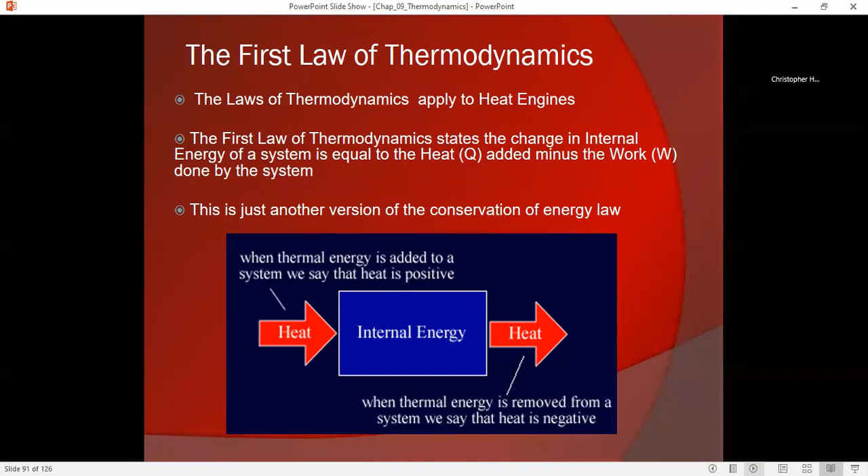What is a heat engine? Well, a heat engine is something that takes thermal energy in the form of heat, converts some of it into work, but this comes at a price. Not all the heat can be converted into 100% work. So some of the heat actually has to be dumped back into the environment where it is simply lost and is not useful in terms of doing anything.

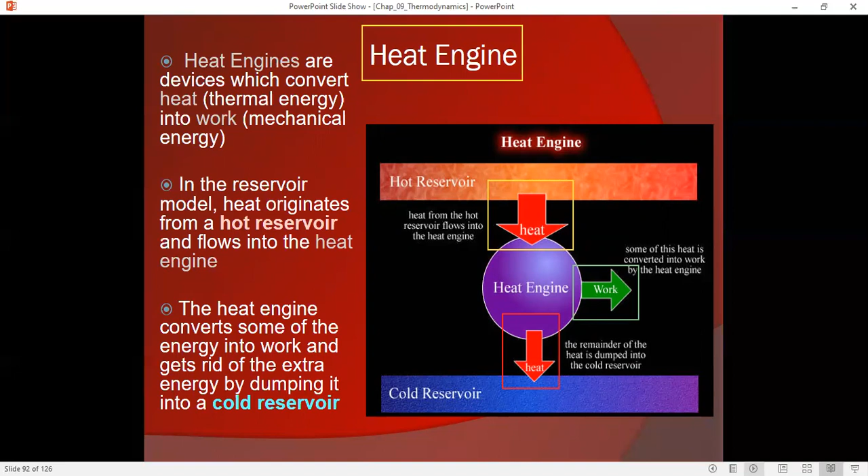So again, we can think about a heat engine as taking some energy from a source. This can be a chemical source. It can be a source such as a nuclear reactor. Some form of energy is going to be converted into heat.

Once it's converted into heat, typically we're going to allow some sort of gas, fluid, whatever, expand. And as it does so, it is going to do work. However, we've got to get rid of some of the heat that we've generated. So what we need to do is dump that heat as waste into the environment.

And of course, we can see factories have smokestacks, internal combustion engines have exhausts. All of these are a way of not only getting the reaction products into the environment, but also dumping waste heat. So that's our general idea here. We're not going to be able to get all of it. We're going to try to get as much of the heat as possible to do work for us.

One of the easiest ways to do work, and one of the first ways that people realized how to do work on the environment, was to use something called a cylinder. And a cylinder would be this cylindrical container, which would have this movable piston.

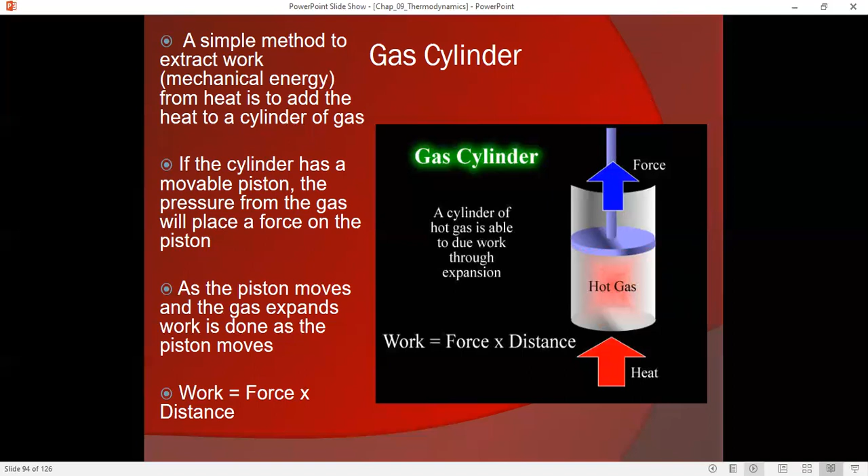Okay, so how are we going to make that piston move? Well, that's not that hard. Think about it, anytime we heat a gas, that gas increases in pressure. It wants to occupy more volume. So there's going to be more force on the piston, so it can do more force and do work on the outside. So that was basically the idea of some of the first steam engines.

You heat up, typically water. The water produces steam. The steam then goes into a piston. The piston moves forward, and a lot of times they want reciprocal motion. They want cyclical motion, so they have the piston hooked up to a flywheel. The flywheel would turn, and that's where they'd get their work from.

The problem is the piston can't move forward forever. So what we need to do is either cool the hot gas down, so it has less pressure and it wants to contract, or if we want to get rid of this hot gas completely, we simply vent it into the environment. So the steam engine would have steam enter the gas cylinder. The cylinder would expand, it would do work on the environment.

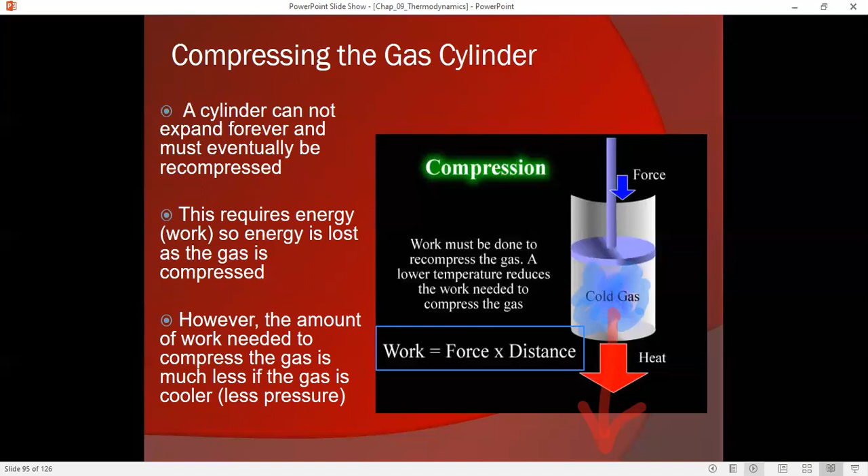And then on the next phase, we would compress the cylinder, basically just have the steam go to the outside. This would allow the whole process to begin over again. The problem is when you recompress the cylinder, you are doing work, so we always lose a little bit of energy as we dump the heat to the outside. Again, we can see this in our diagram.

What is our idea here? We want to get as much work out of the system as possible, so we use the heat to do work on the outside. But when we recompress the piston, we need to get rid of all that hot material we already have. So we dump that heat into the environment as we recompress the cylinder, exhausting this energy, this hot gas that we've already used.

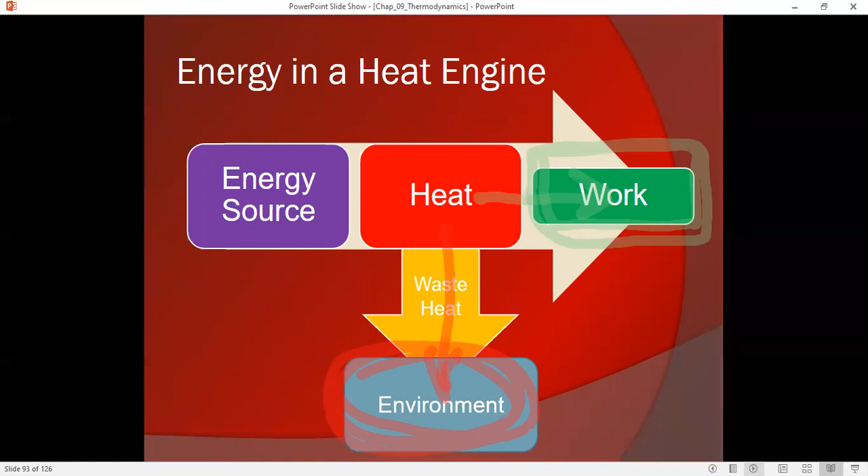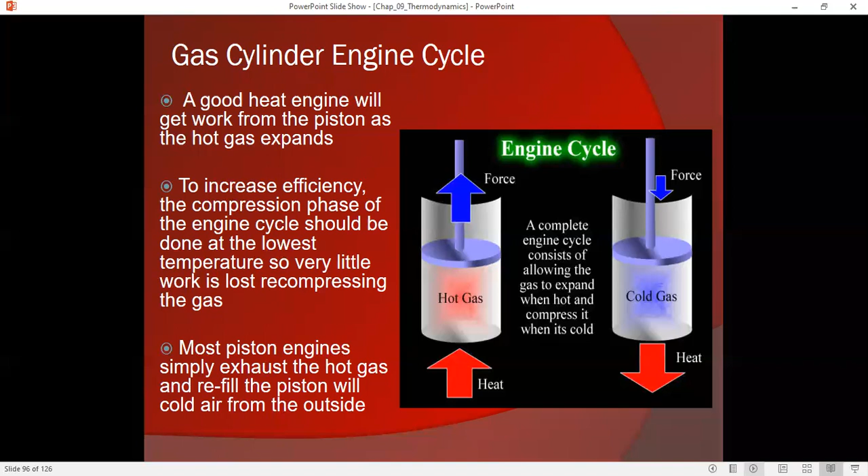So basically, putting together an engine cycle, putting together a process that leads to getting work out of the system generally involves allowing a hot gas to expand and do work on the outside, and letting a cold gas be compressed to allow the piston to reset. Of course, this will repeat itself over and over again.

So let's look at the steam engine. Once again, what was happening with the steam engine, really the first heat engine that was practical? We had some hot reservoir, something we call a boiler, which would generally take this hot flame, usually burning coal back during the Industrial Revolution, and that would convert the chemical energy from the coal into latent heat from the steam, and then that steam would be sent to a cylinder where it would be allowed to expand and do work.

Once it had expanded, the steam would then be pushed out of the system and dumped into the environment.

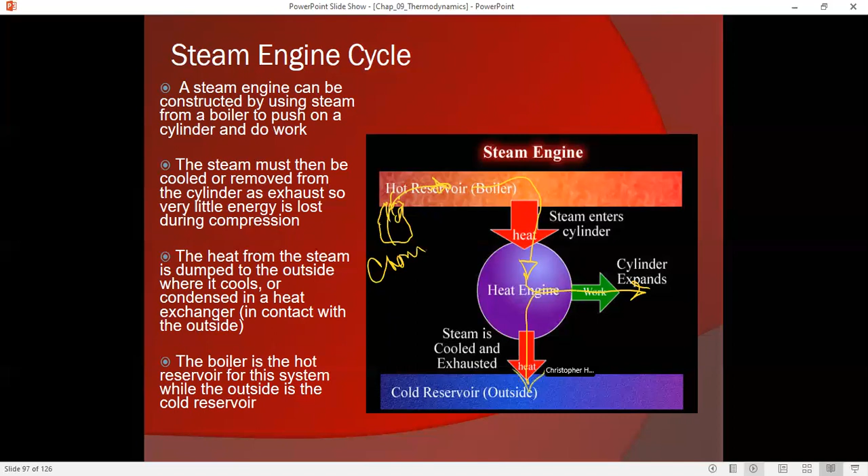Now, believe it or not, the first steam engine was not developed by any famous scientist. It was actually developed by a blacksmith named Thomas Newcomen, who was very good with working with materials. What he did was create the basis for a heat engine. He created a boiler, which he would power with coal, and the idea was to develop this engine that could mechanically remove water from a coal mine. Before, you'd have to use a hand pump, or livestock to power this little piston pump that would extract water.

Now, the problem with this is it was very, very inefficient. At the time, Newcomen was trying to solve a basic problem of mining, which was as you dug deeper and deeper into the earth, you eventually reached the water table. When you hit the water table, unless you were able to remove that water, you weren't going any further. This meant that many mines or quarries had to be abandoned as they filled up with water.

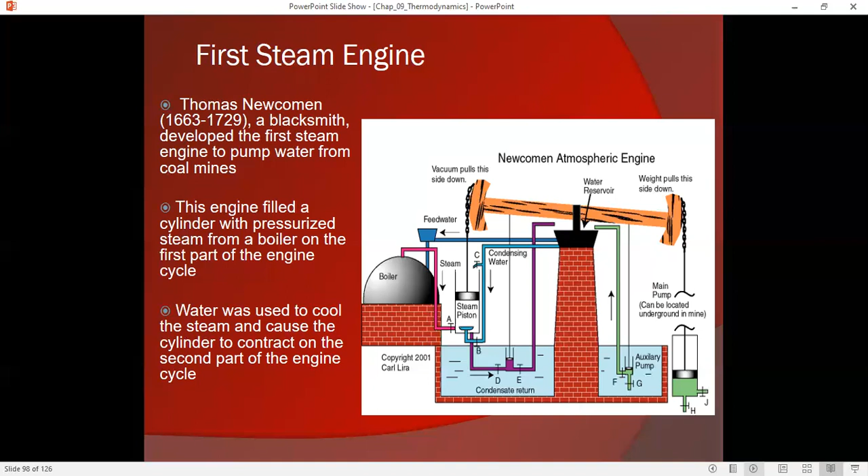Well, with Newcomen's engine, he could pump out the water as it would seep into the mine, and he could do this by burning coal, but it wasn't very efficient. You had to burn a lot of coal to move a little bit of water.

James Watt, however, figured out that if you could make the compression cycle lose less energy, he did this in 1763, you could greatly improve the efficiency of the engine. He developed this idea of a separate steam condenser system about the time he was working on a Newcomen engine, and this dramatically increased the efficiency of the engine. So we named not the unit of power after Newcomen, but rather after Watt, who improved Newcomen's engine.

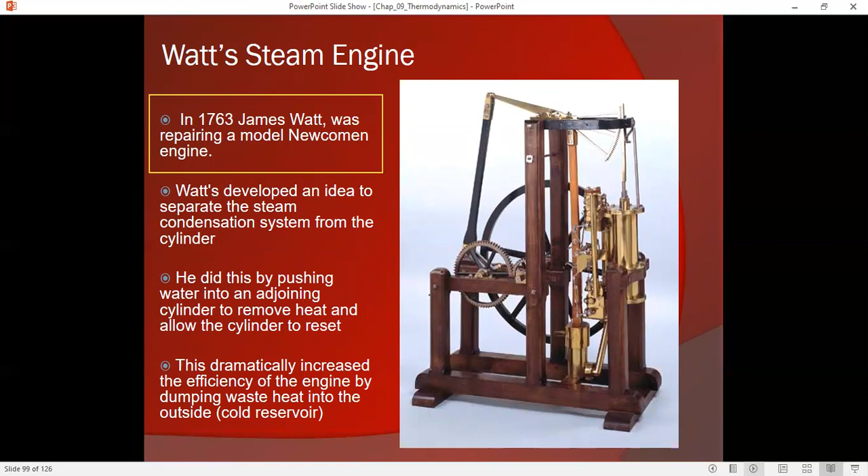So again, we think about steam engines, and it's very, very simple. We use chemical energy to produce heat. This produces steam. The steam does work on the cylinder. The cylinder can do work on the outside. And then that steam is recondensed and dumped to the outside.

Now, steam engines were really responsible for the second industrial revolution. Of course, there were great strides made in agriculture too, but it was really this availability of inexpensive mechanical work that powered industry.

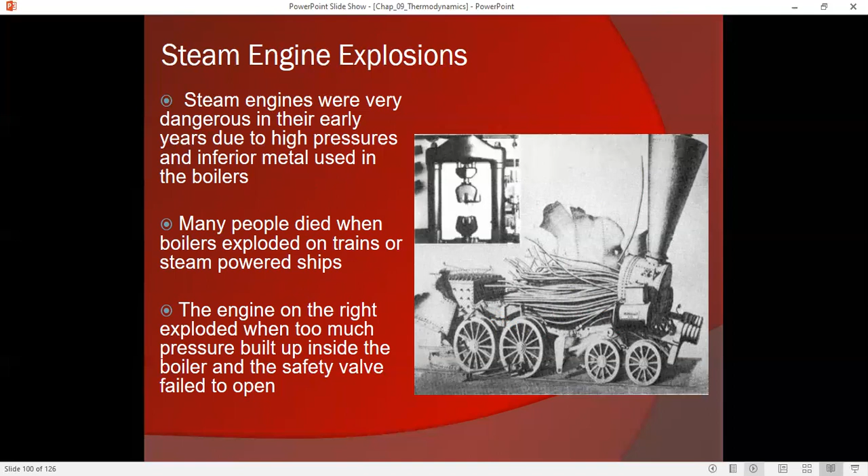So again, an incredibly important invention as far as the Industrial Revolution goes. But of course, like any technology, when it's first employed it was very dangerous until better materials and better designs were used. One way to improve safety was an attempt to improve the efficiency of the engine, so you didn't need as much energy to do the same amount of work. Nicolas Léonard Sadi Carnot was a French physicist who worked on improving the steam engine to decrease the amount of energy generated and make them as efficient as possible.

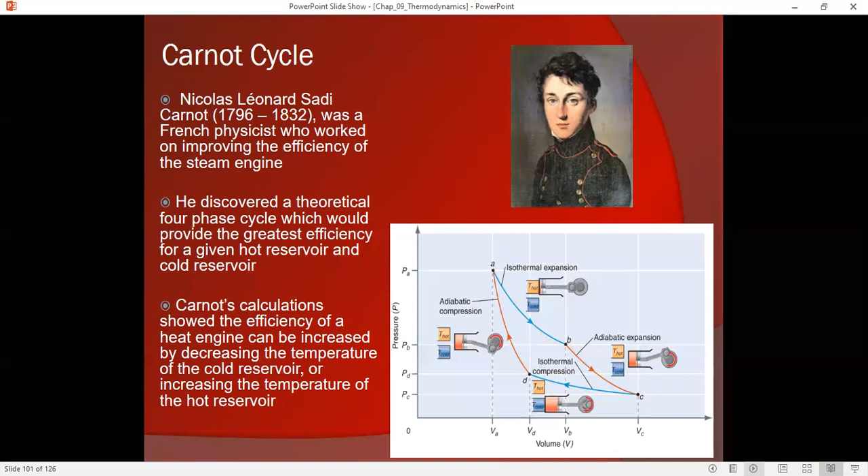He discovered that if you allow a cylinder to expand at a constant temperature and then expand freely, then compress at a constant temperature and compress freely, in 4 different phases known as the Carnot cycle, you could get the most efficient engine possible, reducing the need for as much energy. This was a theoretical engine, and practically it was very difficult to implement. But Stirling looked at Carnot's engine cycle and discovered he could produce a mechanical engine that would come very close to the Carnot cycle - this is called the Stirling engine. Unfortunately, given the materials available at the time, the Stirling engine was too bulky and expensive to build, so steam engines remained less efficient and quite dangerous.

What's interesting is that now, with the advent of new technology, Stirling engines have made a comeback. They were actually invented back in 1816 to improve the safety and efficiency of steam engines, but now, due to their high efficiency, they're being used in cooperation with solar energy to produce electricity in a very different way than we envision most solar energy. Most solar energy we think of as photovoltaic cells, which convert solar energy into electrical energy. This Stirling engine solar collector can actually be more efficient than photoelectric cells. It takes the sunlight, concentrates it onto a heat exchanger, which is then connected to a small Stirling engine that converts it from heat into electricity. Whereas most photovoltaic cells are below 20% efficient, this has been proven to be as high as 50% efficient.

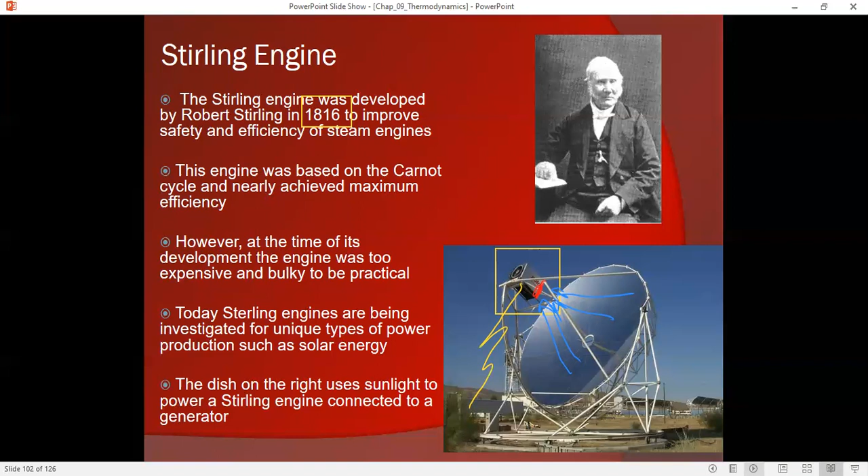Now, the internal combustion engine is obviously a heat engine, but it's different from the steam engine. If we think about the steam engine, it had a hot reservoir, which was the boiler, a cold reservoir, which was the outside, and the piston was the engine itself. An internal combustion engine doesn't have an external boiler - as its name implies, the combustion takes place not in a separate chamber, but within the cylinder itself.

Again, think about the steam engine: we have an external heat source, heating the boiler usually from underneath, using the flames from some chemical reaction - burning coal, burning oil, burning whatever. That heat is transferred to the boiler, which becomes your hot reservoir, produces steam, and the steam goes into the piston. Here, with the internal combustion engine, we take a mixture of gasoline and air, compress it, and light a spark from a spark plug, which ignites the gas.

The gas becomes very hot, produces a lot of pressure, pushes down on the cylinder, and then the exhaust is driven out of the cylinder.

We call this a 4-cycle engine because there are 4 phases to what goes on here. The first phase is we draw in the air and fuel. The next phase is we undergo compression. We undergo combustion, and then after the combustion has pushed the cylinder down, the cylinder pushes the exhaust out. So that is a 4-cycle engine.

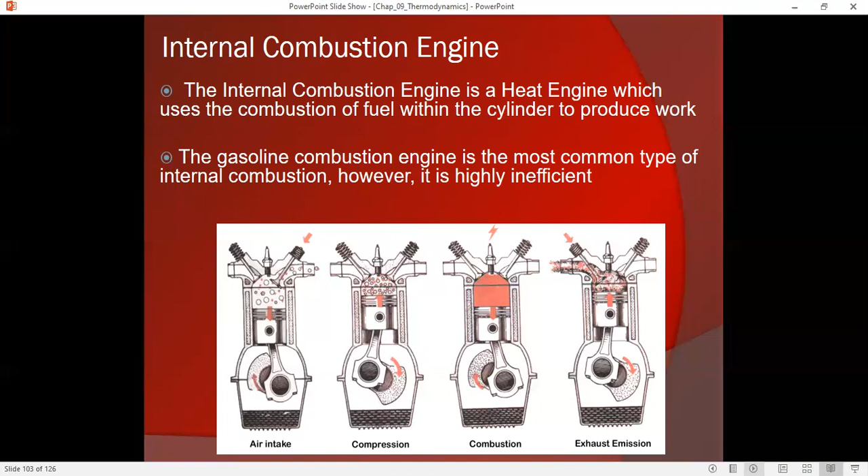In a 2-cycle engine, we actually combine the exhaust and the compression at the same time. So they're less efficient and much more pollutive, those types of engines.

Internal combustion engines are generally not that efficient. Older engines probably got about 20% efficiency. Newer engines at best maybe get about 30% efficiency. That means that 70 to 80% of all the energy that you use simply goes into waste heat.

To improve this, according to Carnot's study in his cycle, Carnot found out that the efficiency of a gas engine, or any engine, increases as we make the cold temperature colder. Well, it can't make the cold temperature any colder, that's the outside, so we make the hot temperature hotter, which for an internal combustion engine means making the cylinder combustion temperature higher.

The problem with that is the higher we make the internal temperature, the more heat we place on the cylinder parts and the more wear and tear they experience. That means an engine running hotter is more efficient, but it's also going to wear out faster. So what we do is we actually experiment with other materials.

We experiment with tougher alloys. We coat alloys with ceramics, which are very good at standing up to heat. But again, this increases the cost of the engines.

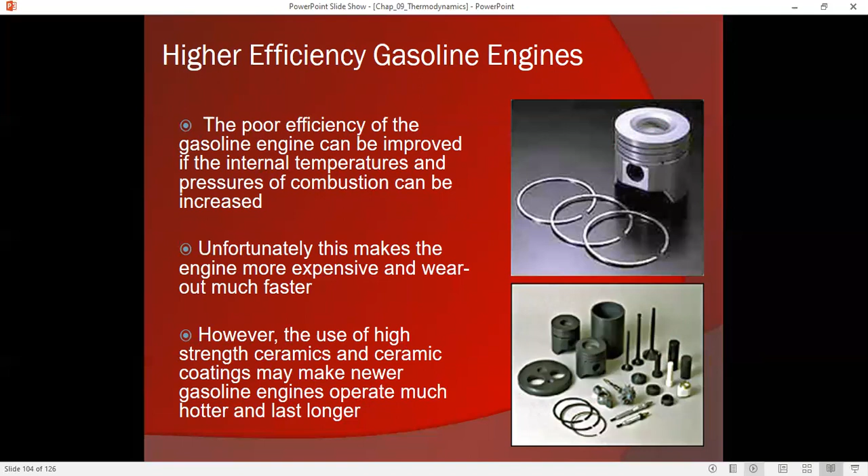So again, in engineering these internal combustion engines, there's a real challenge. We want to keep the costs low. We want to keep the durability high, the reliability high, but we also want to keep them as efficient as possible. High efficiency, lower cost, higher durability - these are challenges they have to balance.

Diesel engines are more efficient than gasoline engines because they have higher compression ratios, but diesels have a number of problems. One, they're much more expensive, they weigh more, they're noisier, and they produce more pollution.

We have improved their technology where newer diesel engines are becoming much less pollutant. In fact, today's diesel engines, you actually have to add a fluid to the exhaust system, where the fluid will capture a lot of the emissions that are given off. But in any case, diesel engines do provide greater efficiency.

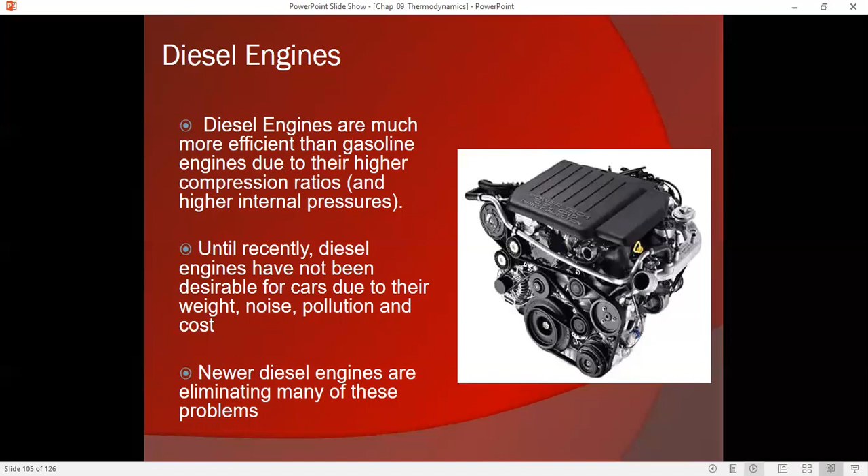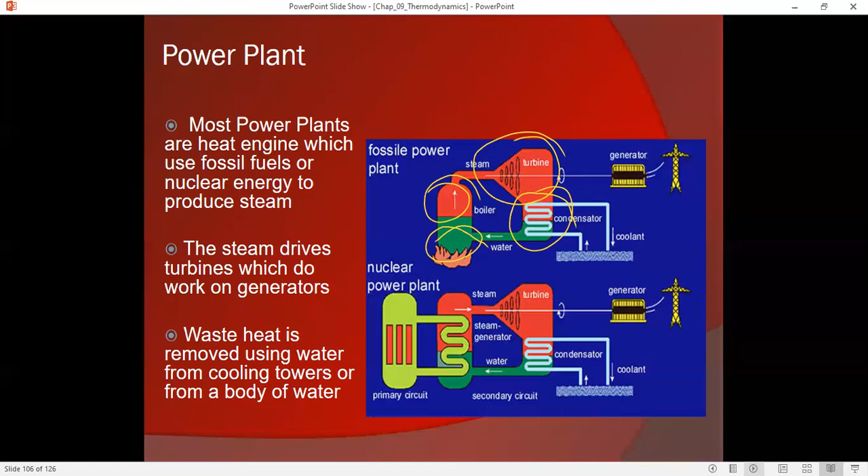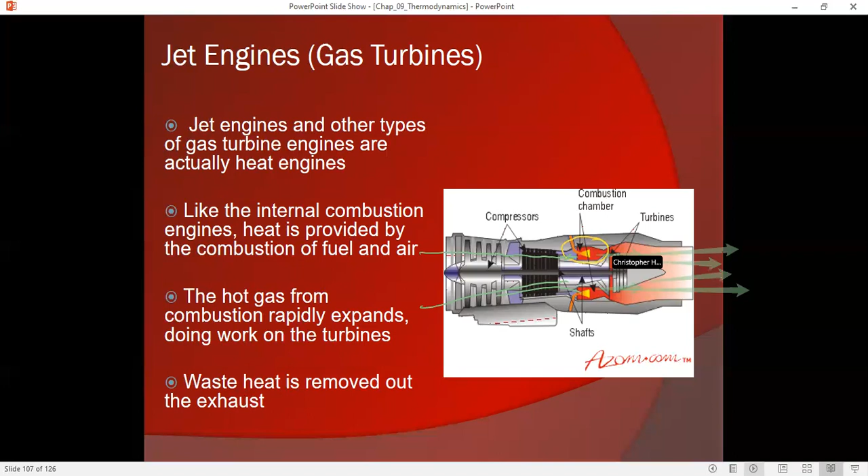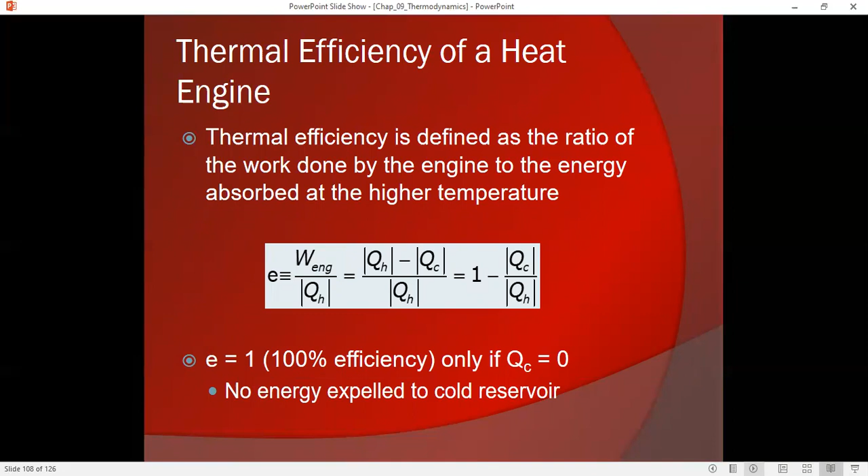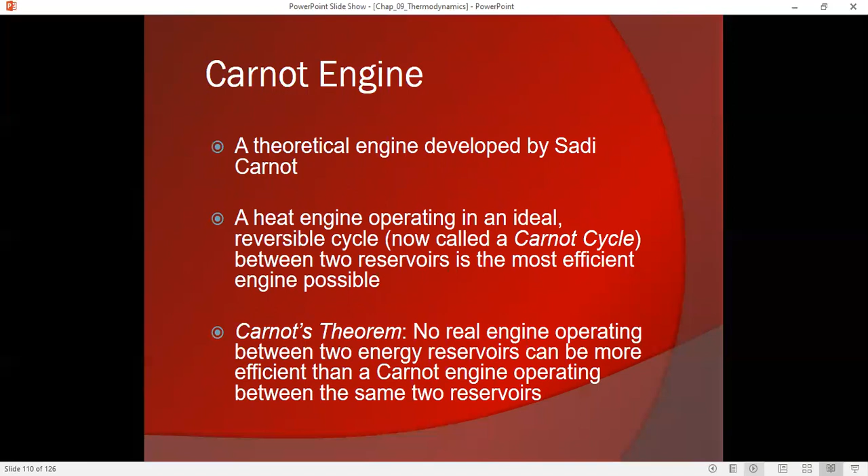Again, efficiency is very, very important to engines. Efficiency is how much work we get from the engine compared to how much energy we put into it. We can never reach 100% efficiency - we always have to get rid of some of the energy as waste heat. However, Carnot's study of the thermodynamic cycle tells us that even though no real engine operating between two energy reservoirs can be more efficient than the Carnot engine, the Carnot cycle represents the best efficiency we can get given two different temperatures.

The whole push to make engines more and more efficient is to get this efficiency closer and closer to 1. Really, the other way we can write this equation is times 100% - if we write it in percentages, we want to get as close to 100% as possible. If we could make the cold reservoir absolute zero, or make the hot reservoir infinity, we could have a 100% efficient engine. Of course, that's impossible. So the best we can hope for in any of these systems is to make TH as large as possible. The bigger TH becomes, the bigger we make this denominator, the less efficiency we subtract, and the closer to 1 we get. Let me give you an example.

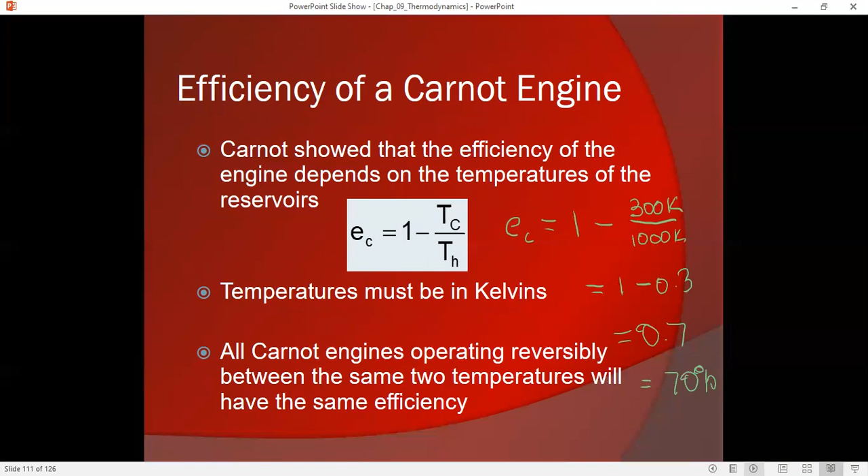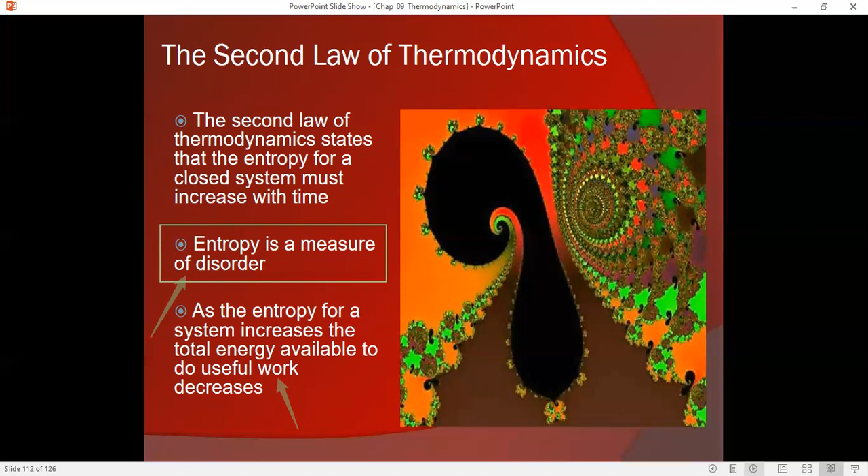Entropy is a measure of disorder. We can think of entropy as a measure of how difficult it is to turn energy into useful work. As the entropy of a system increases, the amount of useful work available becomes less and less. Entropy is a very important way of figuring out whether a system is going to be efficient or not. The less you change the entropy for a given heat engine, the more efficient it becomes.

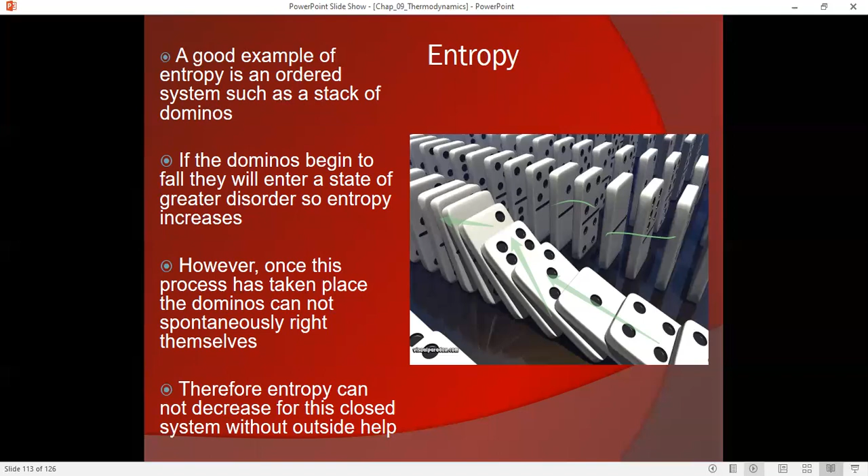Here's a good example of entropy. You've seen these dominoes, right? You set up all these dominoes. The entropy of this system will naturally want to go where all the dominoes fall. So spontaneously, if I start this process, each domino knocks down its neighbor, and suddenly all the dominoes are knocked over. That's an increase in entropy. But what will not happen is the dominoes naturally setting themselves back up—somebody else has to do that. So in this system, entropy naturally increases, and there's less energy available to do work, in this case, for the dominoes to fall.

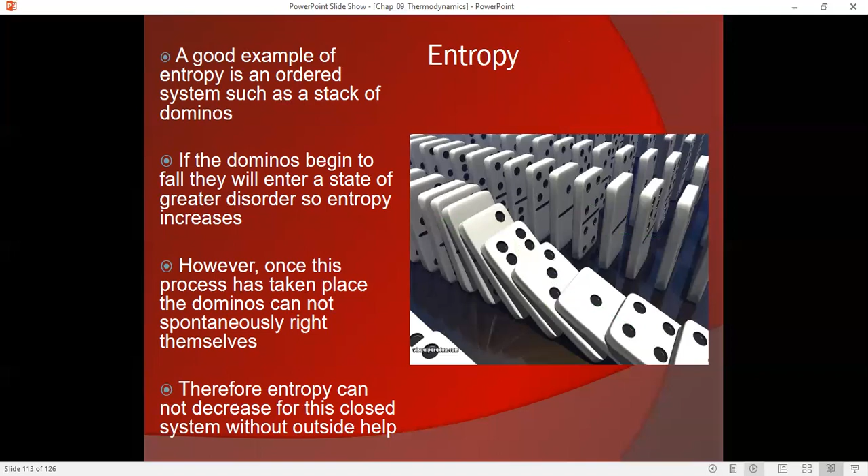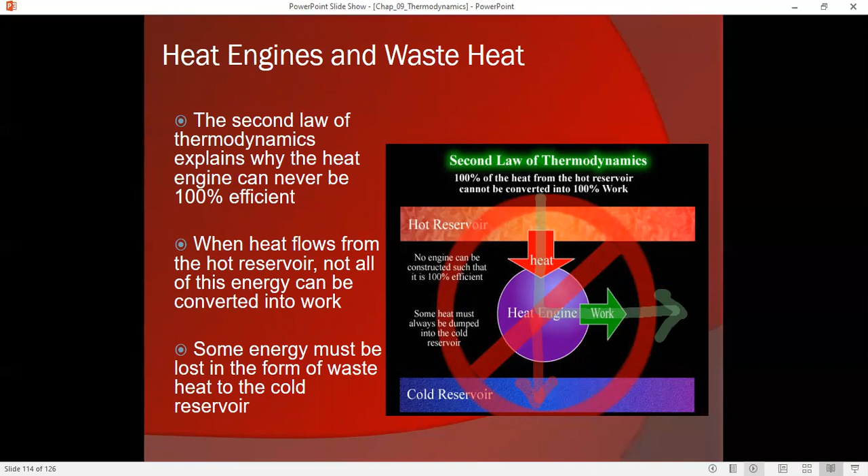The second law of thermodynamics again talks about entropy. But what happens as a result is that no engine can be designed such that 100% of all the energy is converted into work. That can't happen—a small amount of energy always has to be dumped into the cold reservoir. So a consequence of the second law is that no engine can be 100% efficient.

Let's talk about something else: heat pumps. A heat engine takes energy from the hot reservoir, sends it through a heat engine, turns some of that into work, and dumps the excess energy to the cold reservoir. It's sort of like the way water flows over a water wheel. Water flows from up the river, goes down the river, and we can put turbines in its way, and we can generate hydroelectric energy from that—we can do work from that.

So heat naturally likes to flow from a higher temperature to a colder temperature. But what if we want the heat to go the other way? What if we want heat to go from a colder area and dump it into a warmer area? Is that possible? Well, it is, but it's going to take work. We're going to have to expend energy to pump the water uphill. In this case, we're pumping heat uphill. Yes, heat's not a substance—heat is energy. But the analogy of water is a very important one here.

If we let heat to its own devices, heat will just go from a higher temperature to a lower temperature. If we, however, use work, we can move the heat from a colder temperature, just like moving water from a lower elevation to a higher elevation, simply using some of the processes of thermodynamics.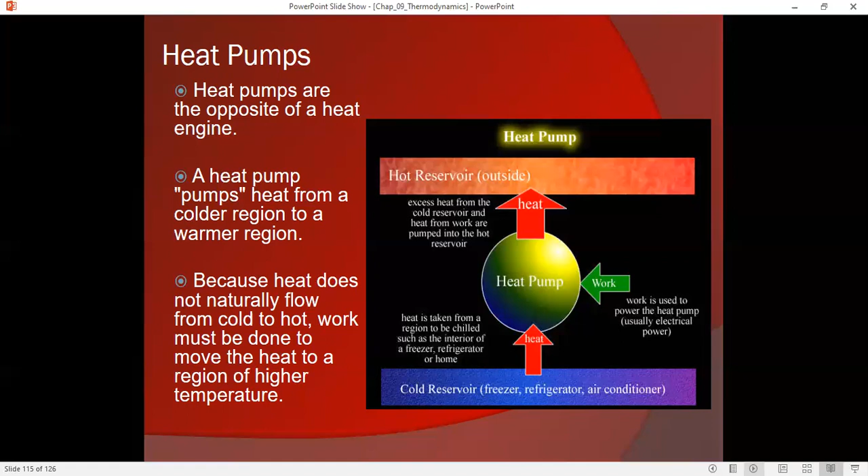We're going to use a refrigerant, and we're going to compress and expand the refrigerant gas so that it can change temperature and absorb heat from the cold reservoir. We're going to cool down the refrigerant, make it cold so it absorbs heat from the cold reservoir. And then we're going to compress it, which heats it up, and that is going to allow it to become warm on the outside, and then it can dump heat to the outside.

Here's a heat pump system. Again, we have some region that we want to make cold. We want to make this interior cold - refrigerator, freezer, air conditioner, whatever. We want to remove heat from it. So we use the refrigerant to extract heat from it. The refrigerant is cold once again, and then we heat the refrigerant up so it naturally wants to dump the heat into the environment. But again, this will come at a cost. This doesn't happen naturally. We need to do work on the gas, the refrigerant, to make it hot sometimes and make it cold other times.

I like to say that this is sort of like analogous to a sponge. When you compress a sponge, you force the water out. When you relax a sponge and allow it to expand, it can absorb water. Same thing with this refrigerant. When we compress it, it becomes hot and it tends to give off the heat. When we expand it, it tends to become cold, through a process we call adiabatic expansion.

So let's see how this is set up. How is this refrigerator set up? Well, normally you can have a less expensive system where one system will cool down the refrigerator and the freezer. But in most cases, there's going to be a separate refrigerant system on the back for the freezer and a separate one for the refrigerator. Most refrigerators, if you go to the back of them, you'll actually feel that they're warm because the heat exchanger back there is dumping that heat from the inside to the outside.

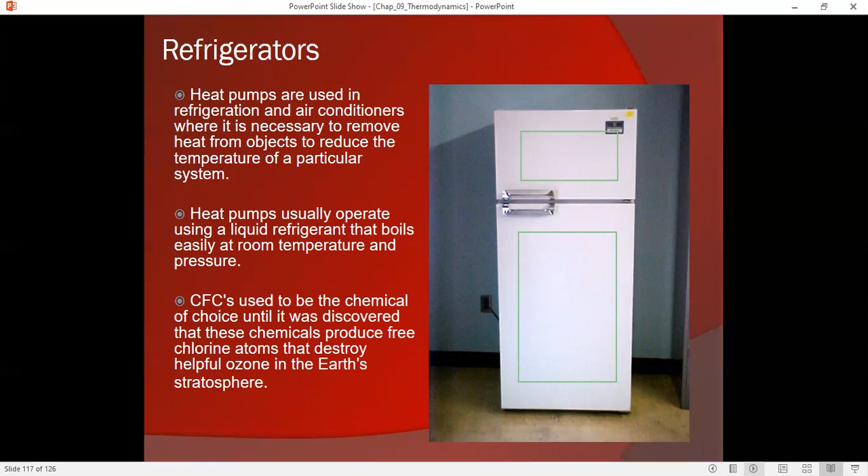What can we see here? Not quite certain that we can see everything here. The motor, I think the motor you can't see. In any case, let's take a look at a diagram of this.

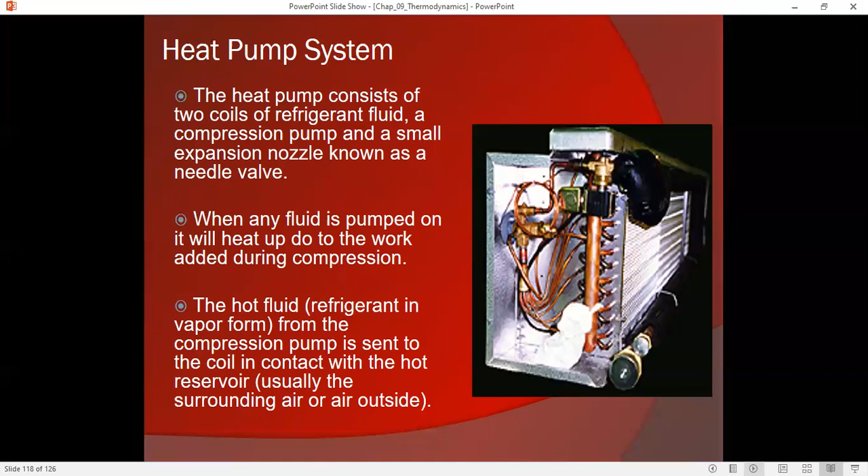Here is our heat pump in its simplest form. On this side, we have the electric motor. This is where the work is going to be done. So the work goes in here. Typically, the work comes from electrical energy. That electrical energy is turned into mechanical energy. And that's basically going to power the whole system, pumping the heat from the cold reservoir to the hot reservoir. Remember, right down here is where you have all your food - this is your refrigerator, this is your freezer. If it's an air conditioner, this is the interior of your house. This is your cold reservoir.

So, the first thing that happens right here - the refrigerant, and it used to be chlorofluorocarbons, by the way. Now they're using other fluorocarbons that don't damage the ozone layer. But the fluorocarbons come from the cold region. They're put into the pump, so they generally start out somewhat cool, not cold, but cool because they've absorbed some of the heat.

The compression pump is going to compress the gas through a process we call adiabatic compression. Now, adiabatic compression - when I do work on a gas, that energy, that internal energy has to go someplace. So all of a sudden the refrigerant becomes very, very hot. It's under high pressure and it's very, very hot.

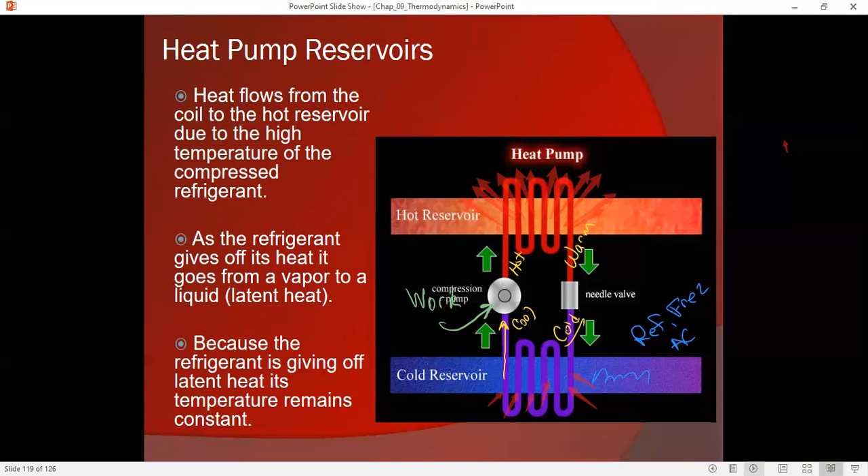But again, that's how a heat pump works: pumping heat out of a cold area and dumping it to a warm area. Heat pumps are rated according to their performance. If they're in the refrigerator, they're always pumping heat from the interior outward. If they're in the freezer, same thing, from the inside to the outside.

If, however, we're using it to both heat and cool a home, we can actually reverse this process. With the heat pump in cooling mode, which is basically when it's acting like an air conditioner, we say the coefficient of performance is how much heat can we remove from the cold reservoir, the interior of our house, and dump it to the outside given the amount of work we do. Surprisingly, this coefficient of performance can be greater than 1.

This is not efficiency. This is saying how many joules of heat can I remove given I have this many joules of electrical energy coming in. So if I'm reaching a coefficient of performance of 5, that means if I want to remove, say, 500 joules of heat from my house using this heat pump, I would only need 100 joules of electricity to do so. So this shows basically how a heat pump can perform.

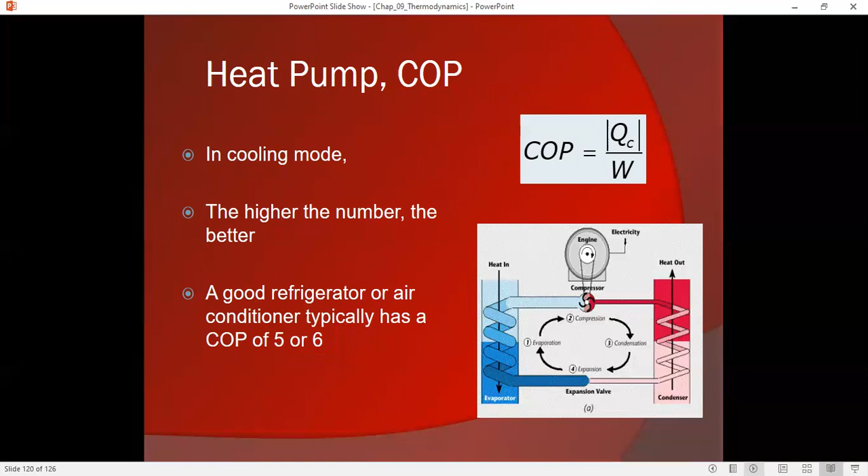But the great thing about these heat pumps is you can actually reverse them. Again, this shows the energy flow in a heat pump. You can extract heat from other sources, maybe the earth, and use the heat pump to then pump it inside your home. The great thing is that the earth is always around 50 degrees Fahrenheit, remaining about that constant all year round.

What that means is it would take almost no energy to keep your house at 50 degrees Fahrenheit, but we obviously want to go much higher than that, maybe keep the house somewhere around 65 degrees Fahrenheit. It doesn't take very much energy to get that energy from the ground into our home—just give it a little extra push with this work, and that's how we can heat our home.

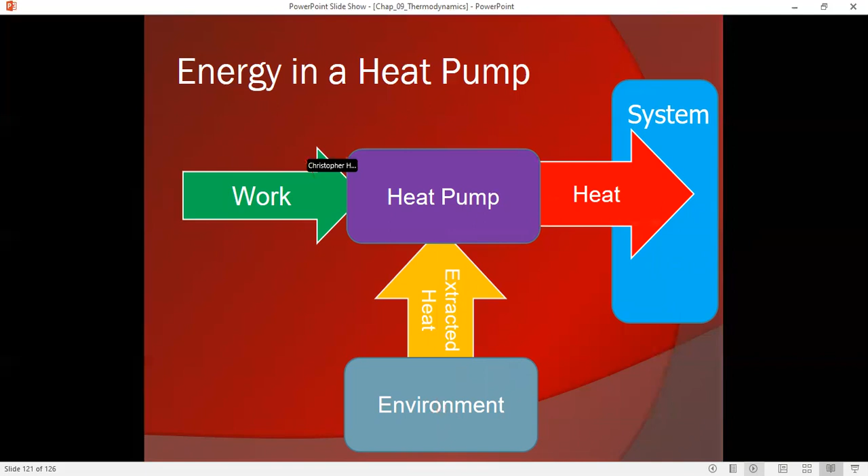Now, here the coefficient of performance typically isn't that high for very, very cold days. It also depends on where you're pumping your heat from. Some heat pumps can actually pump directly from the outside, but especially on a cold day, you're not going to get a very high coefficient of performance. If you're getting it from the ground, your coefficient of performance goes up significantly.

So again, coefficient of performance is how much heat do I get into the house for the amount of electricity I have to spend. Any time my coefficient of performance is greater than 1, I'm doing better than an electric heater, because an electric heater basically converts all of the electrical energy into heat. Here, the electrical energy is turned into work—it's nearly 100% efficient—and that's much less than the heat I actually move.

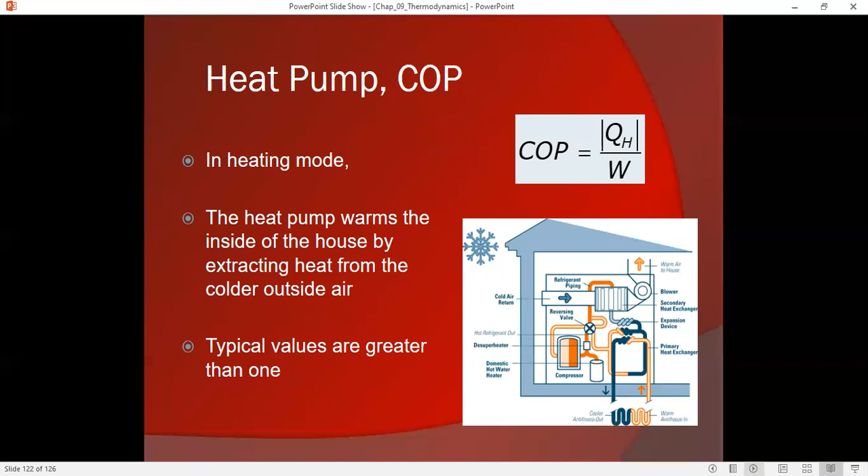Heat pumps are more efficient than electric heaters. Usually with geothermal heat pumps, we're getting our heat directly from the ground. Heat pumps that use the outside air are going to be less efficient.

In the summertime, I want to cool my building, so what do I do? I dump the heat from inside the building into the ground. If the ground's 50 degrees Fahrenheit and I want to cool my building to maybe 70 degrees Fahrenheit, heat naturally likes to go from warm to cold, so that's not going to be a hard thing to do.

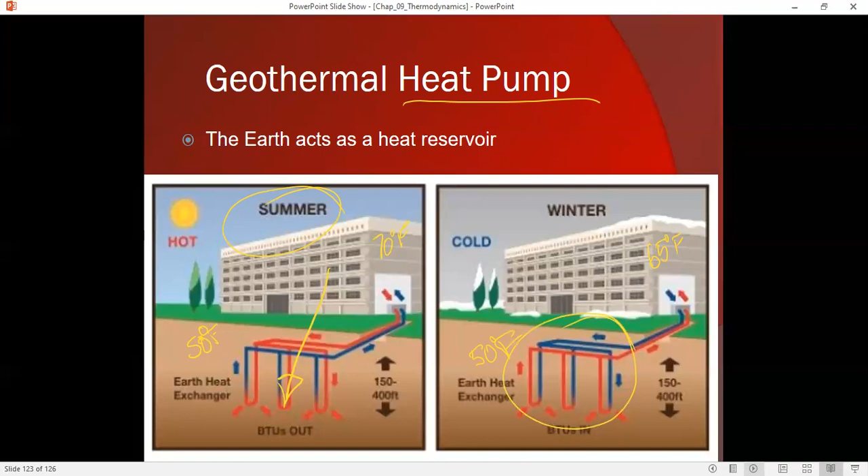In the wintertime, it's colder outside and we want it to be warmer inside, so it's going to take a little more energy to heat. But geothermal heat pumps, even though they use electricity, which we generally think of as inefficient for cooling and heating, have a higher coefficient of performance and far outperform most other means of heating and cooling. The big problem is the cost of putting in the ground system. Whether you're digging wells for the heat exchanger in the ground or burying pipe, that initial cost can be very, very high.

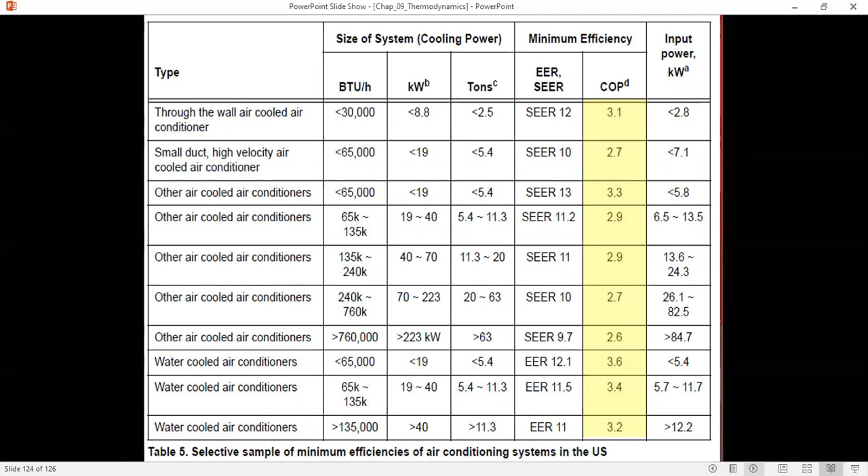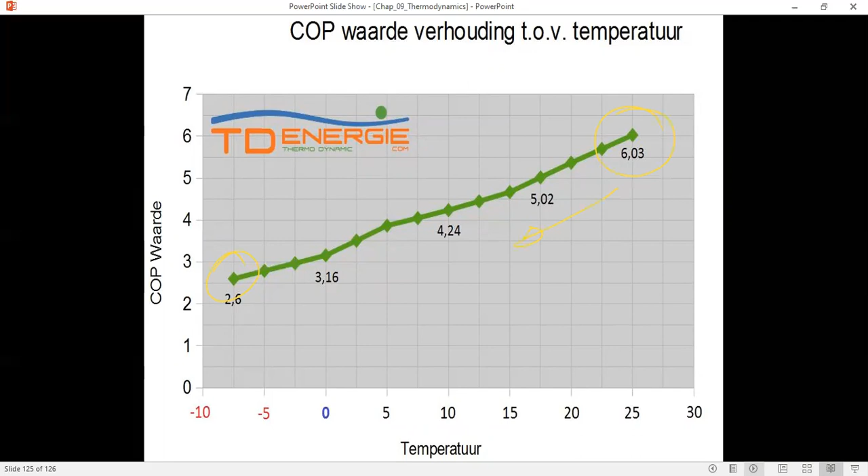Let's talk about the last law of thermodynamics, the third law of thermodynamics. This is where we end. The third law of thermodynamics is concerned with entropy and absolute zero. This is probably the most abstract one.

Let's just review. The first law was about conservation of energy: energy can't be created or destroyed. The internal heat or internal energy of a system is equal to the heat added minus the work done, very straightforward. The second law concerned entropy, but we could use it to talk about efficiency, that no heat pump, no heat engine could ever be 100% efficient.

The third law is sort of a stop sign for us. It states that the entropy of a system goes to 0 as the temperature goes to 0. What this basically means is that all the processes we would use to get down to absolute 0 would require an infinite amount of energy, and therefore, even though we can get close to absolute 0, we can never reach it.